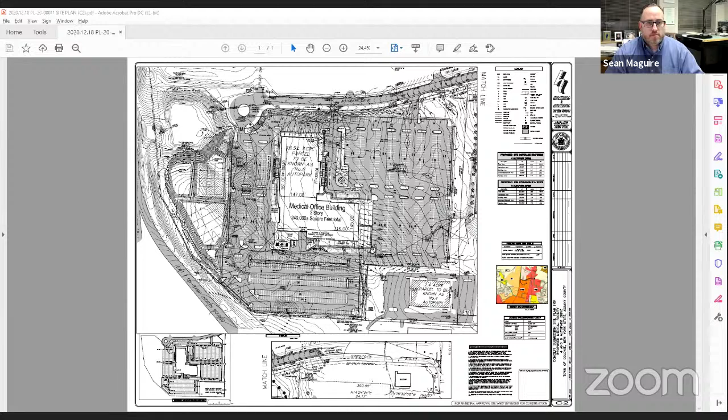There we go. Perfect. Zach, do you have access to that? I don't have it in the shared file here. Yes, I have it right here. Let me pull it up real quick. Sean, if you let me share my screen, I can pull that up for you. I've got it for you right now, actually. Okay, perfect. There you go. And we'll let Bill go ahead.

Hi, my name is Bill Mafrici with Hirschberg and Hirschberg. Dan Hirschberg might be chiming in at some point - he's at another Zoom meeting in Albany. With me also is Rich Rosen, Columbia Development. We're here for 4 and 6 Auto Park Drive and the medical facility.

4 Auto Park Drive will not be changed from its current configuration. We're just doing a lot line adjustment, and as Zach mentioned, we're requiring an ODA because there is no frontage or access to the public road on Auto Park Drive. If you can go to the next slide, Zach.

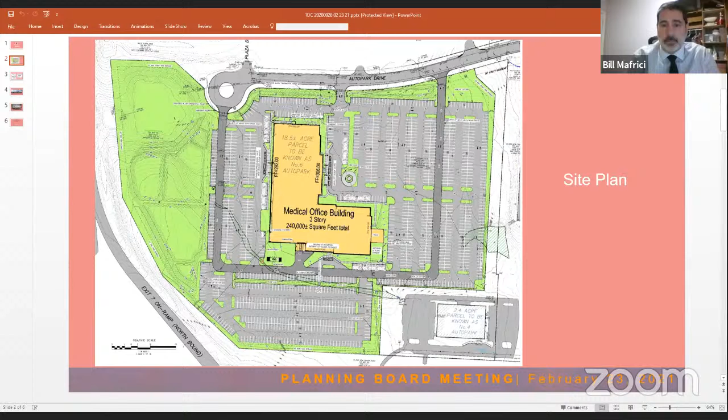Some of the modifications that were made now from concept from sketch: as Zach said, on the north side of the building, we did have the generator and transformers located in that area. We shifted it to the south side of the building. We also reconfigured a portion of the loading dock in the rear. If you notice, there's a darker hatched area for the pavement - that represents the truck route circulation pattern for larger vehicles.

We also show on this plan, which was not in the package, also what Zach said - on the north side of Auto Park Drive, we're proposing a walk. You can kind of see it at the entrance to the existing Goldstein on the north side of Auto Park Drive. We'll have further connection into our site on subsequent submissions.

Utilities, as far as water goes, will include a looped public water extension, which was requested by Latham Water District, the Auto Park Drive water main, and there's a dead end water main on the south side of number 4 Auto Park Drive. As part of this project, the developer is going to interconnect those two and provide a better distribution of water.

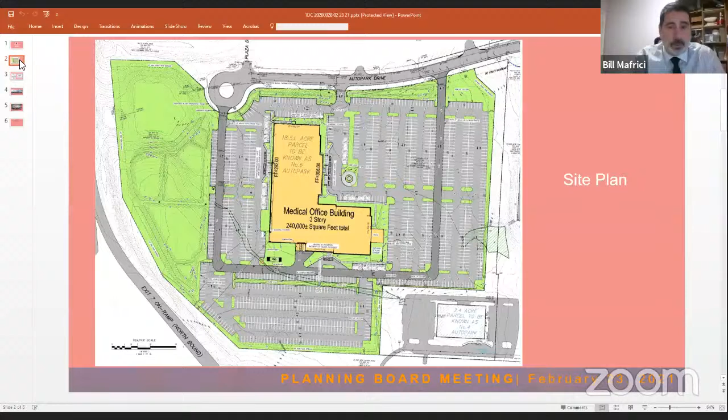If we go to the next slide, we're showing site stats for both 4 Auto Park Drive, which again is not going to be changed or altered at this time, and the proposed 6 Auto Park Drive, both of which are conforming and have adequate green space, exceeding 35%.

There is one difference in what we're proposing in the parking analysis. We further detailed and critiqued the interior layout of the building needs. In subsequent plans, when we submit for preliminary final, we will not need a waiver or reduction of parking. We'll actually be conforming to the parking requirements based on a combination of regular general office and medical office.

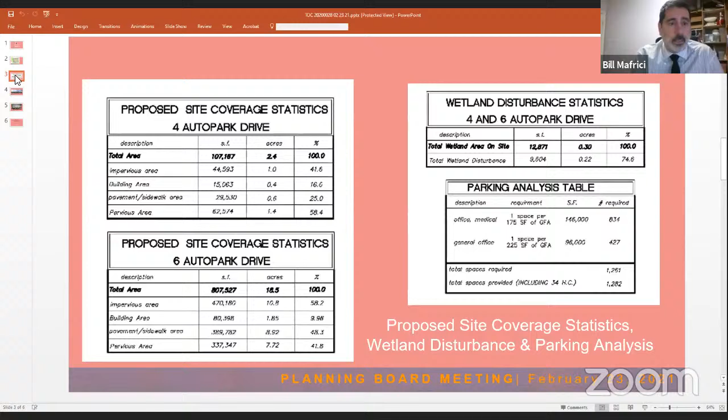The next slide shows the architectural renderings. This is a view coming down Auto Park Drive and the front of the building. The main entrance is fully glassed with an overhang and drop-off area. I think it's a fairly attractive building, and it is a 3-story building in the front.

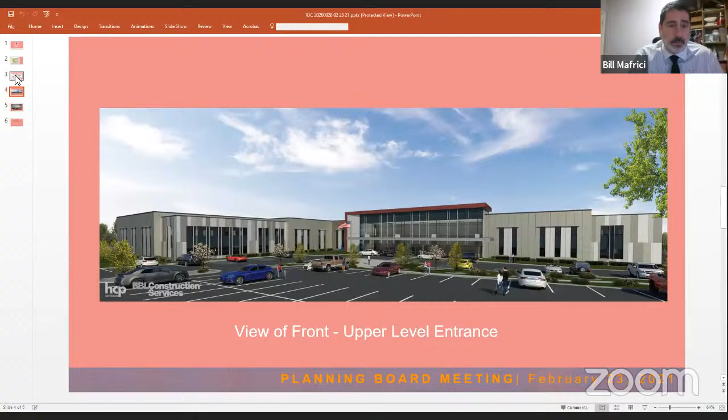The next slide shows the rear view, from the I-87 side, which is a similar configuration, a little less pronounced entrance and drop-off in the rear, but we still think it's fully attractive. If you notice on the top rim of the building, there's a parapet that's going to hide rooftop equipment from the view shed.

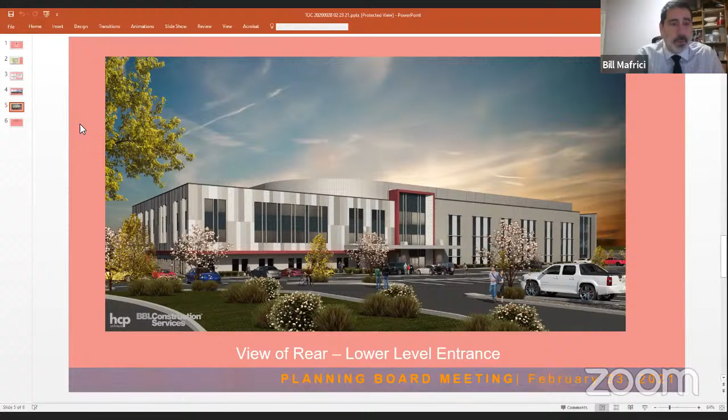And with that, I believe that covers the waivers. We're asking, as Zach stated, for 2 waivers: one for exceeding the 20-foot setback for the minor road, and also parking in the front yard. We won't need any parking waiver for the reduction of parking. Depending on how our calculation works out, we might need an additional waiver request for landscaping islands in parking rows exceeding 20 spaces.

And with that, I'd like to open it up to the board for any questions you might have.

Okay, this is being reviewed by our town designated engineer, in this case Barton and Loguidice, and we have Chuck Voss here. Chuck, I know you got a letter from the adjacent commercial developer, Chris Betty of the Betty Group. Can you incorporate their major comments in your presentation and just do your presentation, if you will?

Sure, Peter, will do. Can everybody hear me okay? Yeah, Chuck, real quick, sorry to interrupt.

We did get a flyover, almost like a presentation for that. Do you want to see the flyover, like it's on YouTube, that the applicant provided us? Would you like to see that before we go into the comments? Sure. Sean, do you mind pulling that up? How long is it? Short, right? Sure, we'll see it. It's like a 3D flyover rendering of the actual site. Okay, it'll be about 3 minutes.

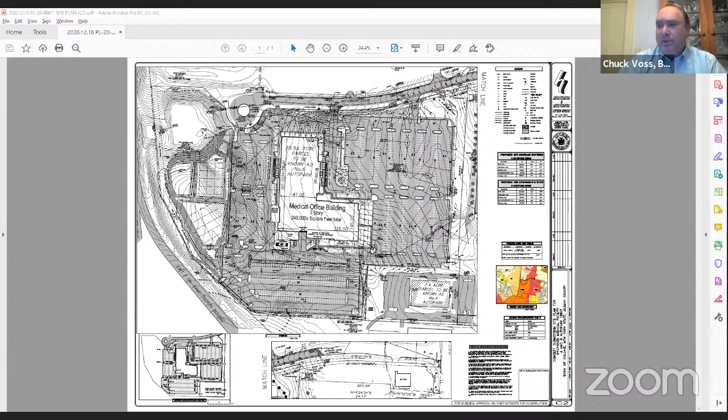They also noted that there are H-core standards for things like building placement, frontage, maximum setback, sidewalks, public spaces, and the ability to incorporate landscaping and pedestrian improvements to the site up to Route 9. So that's about it.

Chuck, you gave a lot of substantive comments. I'd like to give the applicant an opportunity to respond, particularly if there's anything they strongly disagree with, and whatever other general comments they think are significant in response to your review letter.

Well, just like you guys, we were copied in that letter. No, I'm talking about Chuck's letter. Oh, yeah, we're fully in agreement with Chuck's comments.

I think as the project progresses and we submit preliminary final, a lot of those things we will have addressed, if not already working to address. Our goal is to revise the plan and get it back in the town's hands as quickly as we can.

So we take no objection to Chuck's letter. Is there anything else you'd like to comment about the letter, or do you want to defer that? Well, I'd like to just make one comment about the additional driveways, or the 3 driveways. You see how the circulation pattern for separated deliveries...

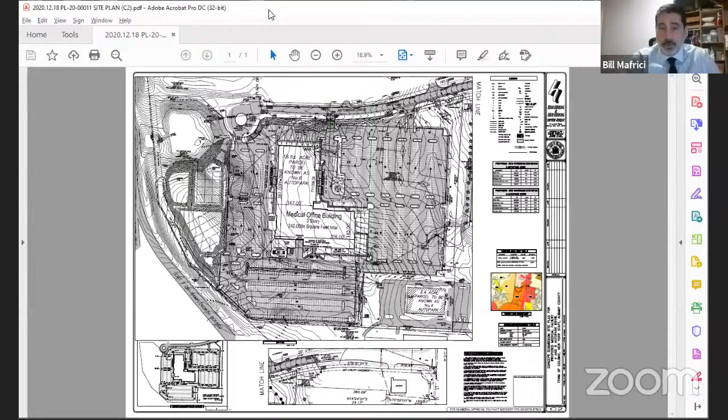And as far as the driveway access, I have to agree. We're talking driveway to driveway. Generally, we would talk street to street. We would try to be opposite, but in this case, it's not street to street. It's just driveways with intermittent traffic. So I don't have a problem with the location of those.

And calling the third one on the cul-de-sac, that's kind of—it's a driveway, but it's into a cul-de-sac, so I don't really think of that as a curb cut at this point in time, so I don't have any issue with the 3. And what about—no, I'm gonna stop right there. I want to leave it up to other people to talk. Go ahead. Okay, Craig?

Sure. First, I think the building is very attractive. I think it'll fit in very nicely there. I agree with Paul. I don't have an issue with the quote unquote three curb cuts.

I'm not supportive of interconnectivity to probably any of the adjoining properties, unless it's determined that we want some additional level of emergency access onto the site. I mean, interconnectivity to any of those other sites is going to put traffic out onto Route 9 at a spot that's not signalized. And it just doesn't make any sense to me.

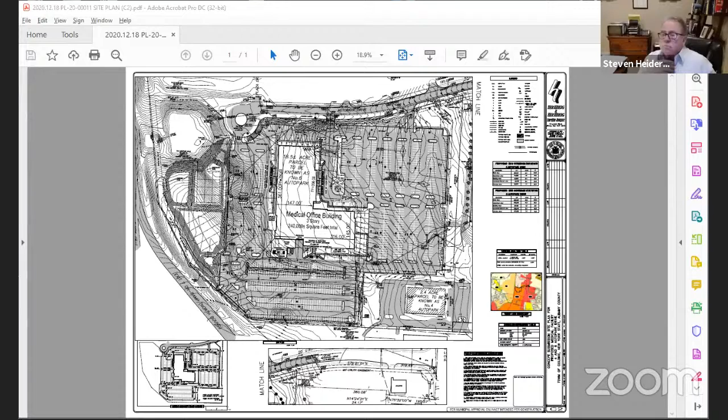Getting to building number 4, are they going to put a gravel road in right next to, on the east side of the parking lot?

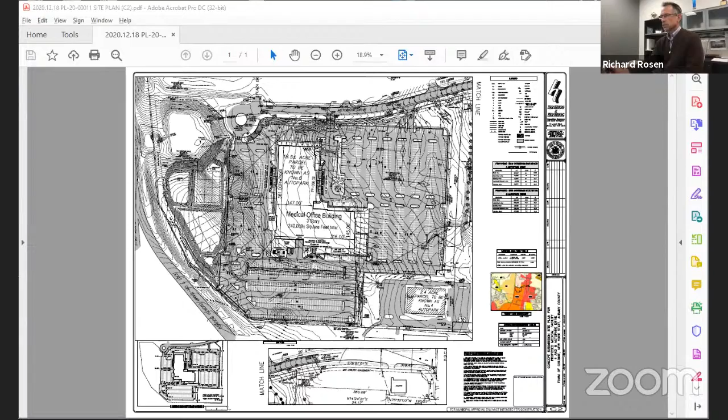Well, currently right now, building 4 is not part of our plan—we will not be acquiring that existing building. What we attempted to do, as you can see on the screen, is building 4 will retain property along the edge of our parking lot, on the east side, all the way out to Auto Park, and it'll have 100 foot of frontage on Auto Park Drive. Currently, number 4 Auto Park has site access in and out through an easement or driveway onto Route 9, past, I believe, 944 or 950.

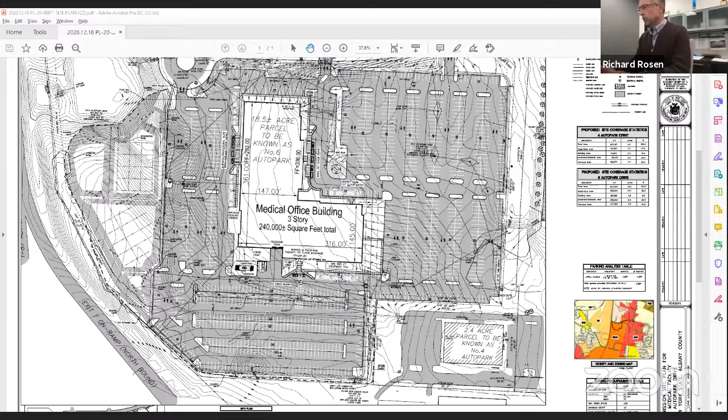In the future, if that site ever got redeveloped, we took the feedback and comments from the board from the last meeting on how to subdivide this parcel. So we've reconfigured it to make sure we have sufficient green space and areas to increase parking if someone ever came back in the future to redevelop this site. They could put a road in adjacent to ours out to Auto Park, or continue to operate the building with its existing ingress and egress onto Route 9.

Okay, I'd like to ask our town designated engineer—I want to follow up on your question, Chip. Can the town designated engineer or somebody in the department, Zach or Sean, comment on this? Are we creating a problem here for Auto Park, or do you believe the explanation is sufficient and there will be adequate access in the future?

Peter, it's Chuck, I can chime in. It appears Auto Park number 4 has a separate access point, potentially, via an existing driveway between several other properties down around 944 and 950 Loudon Road. We don't know if that would be part of an ODA agreement or access agreement, but you can physically access the site—meaning number 4—without having to traverse through the larger parcel, number 6, that we're talking about here.

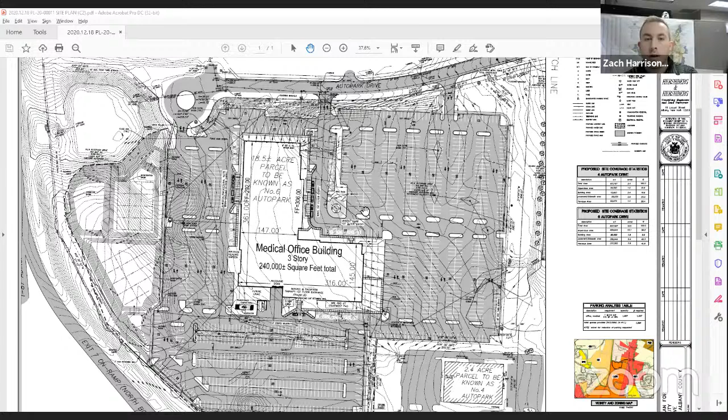Okay, I think that's an answer. So can Sean or Bill, correct? Up in the top corner, if Sean has the capability of zooming in, you'll see where the property with the lot line adjustment that they're going to have to do here. You'll see the frontage they'll have along Auto Park. It's kind of exactly where Sean's cursor is. He's going to show you on it.

They technically have the frontage along Auto Park. The dilemma we run into is that if any development happens on 4 for that property, they need access from the public, they need access from this town road. And right now they don't. So that's what we'll end up with.

Well, do we do the ODA now? Open development area, I know the letter was submitted to the town supervisor. Sean, do you know the status of that? That letter went to the town, was submitted to town hall back in November. I don't think it ended up on an agenda, so I'm just going to resolve that by March.

Okay, Chip, I don't know if that's satisfactory to you, but it is to me. Well, yeah, I guess it's going to have to be. If I could, from the department's perspective, I mean, we talked about this, I think...

I'd like to see that there's a connection here. I don't like creating this additional flag lot. I don't like adding potential additional curb cuts, which we've gotten all the justifications as to why we're not lining these up, and we have the potential to introduce another curb cut directly across from a driveway in close proximity to another curb cut. So I think that, from a long-term perspective, this isn't the right solution.

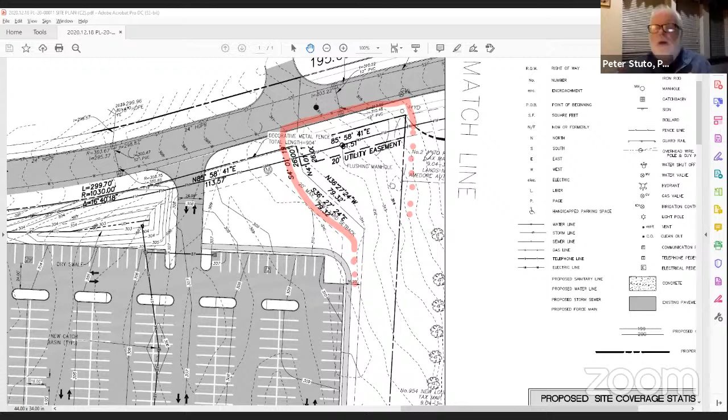Okay, my comment will be to our town designated engineer and to our planning staff, let's work this out, okay? I think you hear what the board's saying. I think the rest of the board members can speak for themselves, but we support the recommendation, we generally support the recommendation of our staff and our town designated engineer.

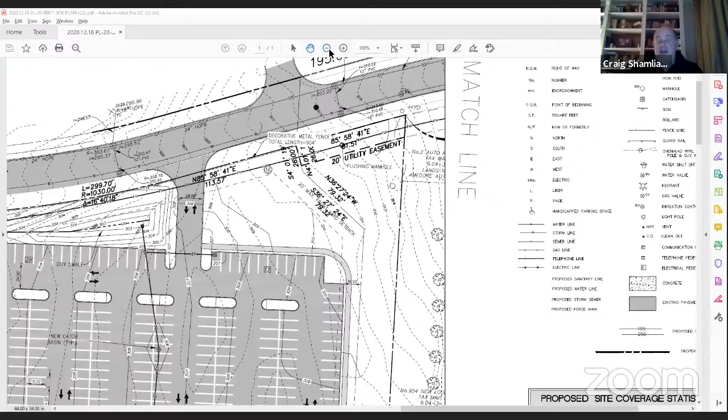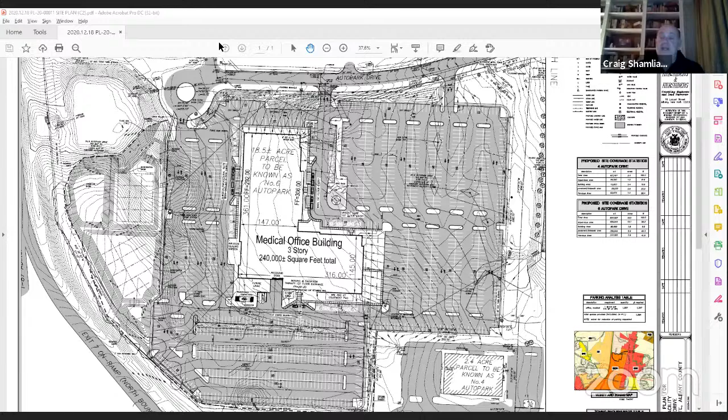If I can just chime in for a second. The one thing I'm not terribly supportive of is whether that becomes a flag lot or that strip of property goes with 4 Auto Park. I understand it would certainly meet the 35% greenery requirement, but what I personally wouldn't want to see is a massive building on the lot proper of 4 Auto Park and the green space be that strip all the way along out to Auto Park as the greenery. That to me doesn't meet the spirit of green space, just so everybody understands, down the road I would not view that too favorably.

And Craig, that's the challenge too, by suggesting this access up this strip here, is that if they needed to receive access, we blow the green space ratio out. Correct.

Okay, so you guys have a little math to do and a little revision drawing to do probably. Okay, Chip, do you have any more comments or questions?

I didn't see in the flyover or in the renderings an entrance for urgent care on the front of the building. It's supposed to be on the front, the section facing north, more in the middle of the L. Move it over so it's halfway... the part facing north on the front, right to the right of the word 'building'. Is that where you're talking, Chip? Yeah, right there, that's it. We've developed the plan in the building a little further, and at this point that entrance was removed.

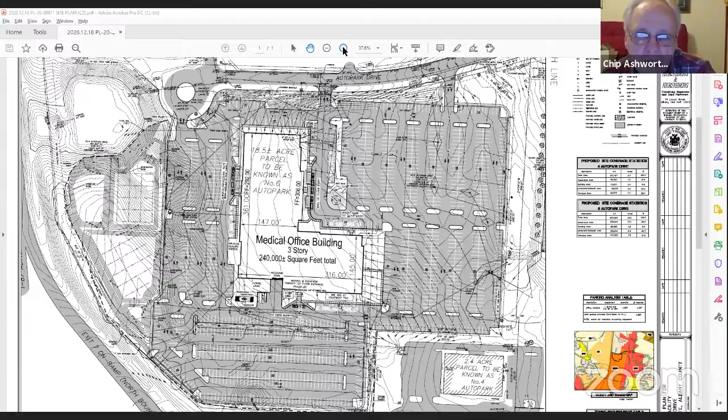I don't see any... oh, in front of the main entrance, on the other side, that big island, you have, was it 6 handicap spots? Right there. Go back to the big island, all those handicap spots, down near the main entrance. Yeah, right there.

Wouldn't it be better to put several of them over on the other side on the walk so they don't have to cross in front of traffic? I think the architect looked at that and didn't like the distance those spots were from the front door, but I can have them look at it again. It's just off the sidewalk and it'd be better than crossing in front of traffic. We have some challenges with the grade in that corner to make the transition from the finished floor, so it might exceed the requirements for a level handicap spot, but we can definitely look into that.

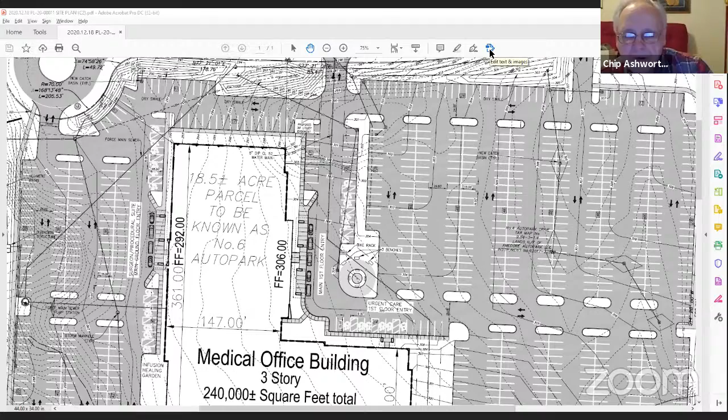As far as the electric vehicle charging stations, I think you should have them on each of 3 sides of the building, with main, real heavy duty infrastructure, because the time's coming when the majority of cars are going to be electric. Especially since probably a lot of the parking for employees might be on the south side of the building.

Yeah, we anticipate that, and I've already instructed Bill and our engineering firm to look at proposals for the best and most effective, most universal type of equipment to use. We plan on at least doubling, maybe tripling what we originally had on our application, as suggested by the town engineer. When I say heavy duty infrastructure, I mean so they can be expanded. So you're saying size the service going to those charging stations in case you need to add on in the future. Yes, sir. You will have to add on in the future. Yep.

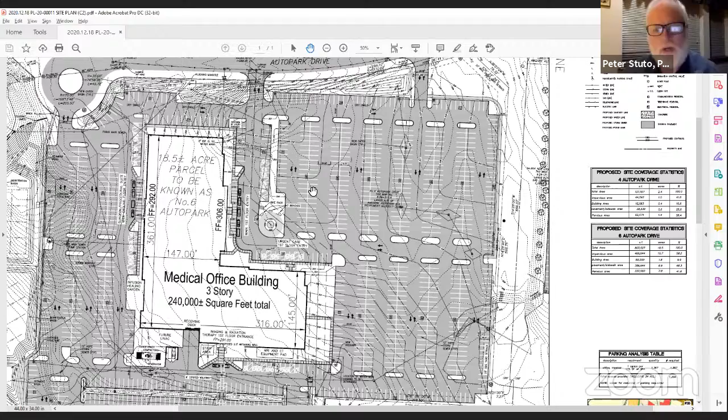Okay, I'm done. Okay, Lou, comments, questions? Looks like everything's been covered pretty much. The one thing I like, again, I agree with Craig, you ought to take another look at the parking and see if you can bank some of it, like you said you would. That whole area over there has an abundance of parking and it's never filled. I know this is a different type of business, but take a look at it. I don't see any harm in banking something, and then if you realize you need it, just open it up.

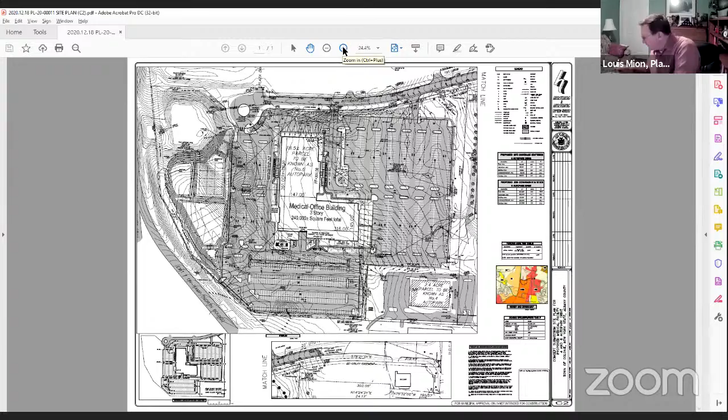To Chip's point about the handicap spots, instead of having them all in a row, can you have them like 3 on one side, 3 on the other, however it's broken up there? Yeah, we'll take a look at that. Instead of putting them alongside the building, leave them where they are, only bring some of them up so they're facing each other.

Am I making myself clear? Bring it there, yes, that brings them closer to the front, and either way you're going across. But there will be a considerable amount of busy pedestrian and vehicle traffic at that first floor entry and canopy, even though we provide sidewalks around the building and out into the parking field. Everybody's just going to take the quickest path and cut across there.

But we'll take a look at the locations of those handicap spots again. I look at the 7-Eleven building, and they've got it constructed similarly, along down the side, and it's actually easier to park across from the doorway and walk across. It's closer, and if you're in a wheelchair, or hurt and need a cane or crutches, it's a lot easier to walk across than to walk the length of the sidewalk.

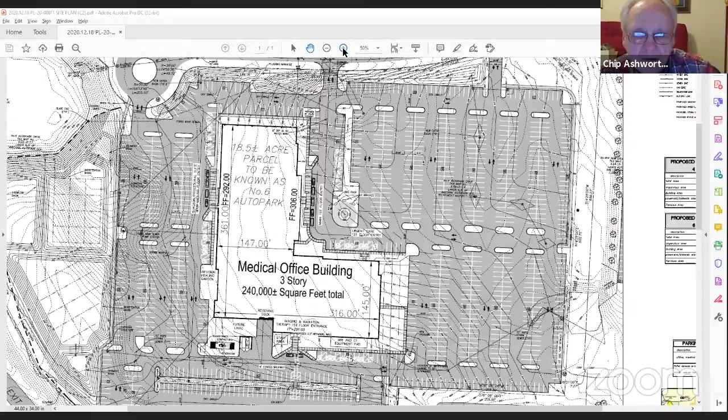Yep. While we're still on the subject of handicap spots, if you eliminated the entrance for urgent care, then why don't you move some of those up to where I suggested before, on the east side, on the other side of the main entrance?

Well, when we say we eliminated the entrance for urgent care, we are not going to have a drop-off or a drop-off canopy there. We plan on having probably an existing exterior door at that location to access that part of the building. Once I know who the tenants are and once we start getting into the interior design and programming, I definitely see that as some type of secondary entrance/exit to that side of the building. For now, that's our best guess and our best design going forward.

Okay, and another thing to piggyback on what Lou said, with snow removal, if you could bank some of that parking, that would be a spot where you could put the snow instead of having to truck it out. And if you ever had to open them up for parking, then you'd have to revert to trucking the snow out. That's it, thank you.

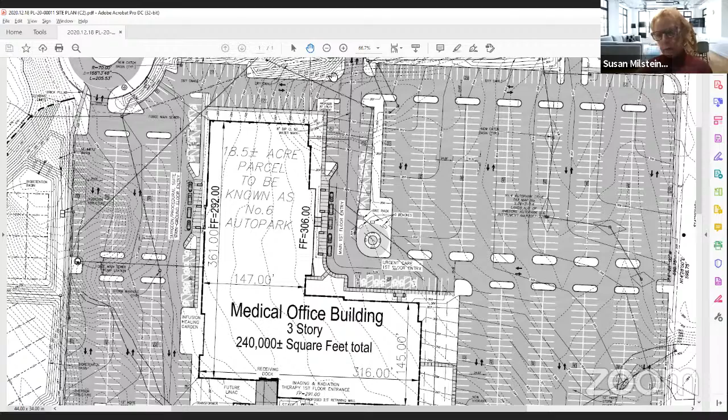Susan: So at this point, do you know who the tenants are? Respondent: I have a very good idea, but I cannot make a public announcement yet because I don't have a signed agreement. But we are working with medical users and an office user currently, right now in discussions.

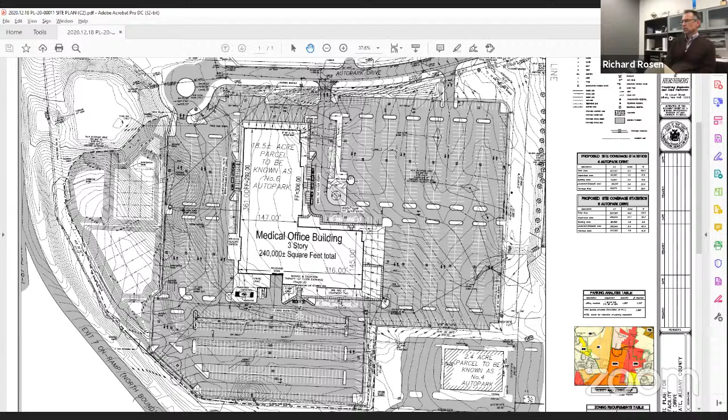And the reason I asked is then you would have a better idea of the parking needs based on that. Absolutely, absolutely. Right now we're doing it based on the operation of other properties we have, based on the use. So once we firm up who's going in there and what's actually going to happen, we can take a more accurate look at the parking requirement. That's my only question or comment.

Okay, Chief Heider? Yeah, I don't want to belabor the points, but as to the parking, I think you have to look at the use of 711 and 713 Troy Road, where many times you have to drive around that parking lot to look for a space. It's a comparable sized building or set of buildings with a comparable number of parking spaces. So as much as I love bank parking, you may have to think twice about that.

But if you do think about bank parking, I know everybody's probably looking at that south area to use with snow. I would like you to bank the top area, the north side, because I think there's a lot of blacktop facing Auto Park Drive. I get the location, it's a beautiful building, it's the right place for it. But if you were to bank anything, I'd bank that whole front parking that borders Auto Park Drive, which I'm sure nobody's going to want to bank, but that would be my suggestion.

Landscape wise, I think the flyover was great, as long as that's what gets planted. And I think that should be put in the minutes, because I think it would look very extensive and very nice. This number 4 Auto Park bothers me.

If you drive past that building, the address on the building is 950 New Loudon Road, not 4 Auto Park. And there's an entrance from 950 through the parking lot, through the snowbanks. They're using that to get back to this building now, as well as this easement going out to Auto Park Drive. There's already a building on it, a very old warehouse, a pretty big warehouse as it is.

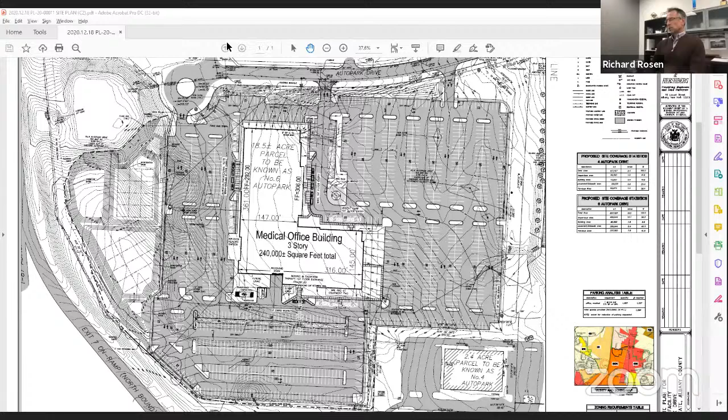I mean, that depends on the use and who it is and what they put back there, that was the future of it. So we thought that providing that 50-foot strip up the east side of our property and the 100-foot access, almost trying to create a flag lot, was our best attempt to try to keep that parcel as independent as possible the way it is right now.

Right. Well, I think that precludes, just what you're saying, what Chuck said before, you're not going to get into interconnectivity between this lot and any other lot. I think the Betty letter addressed that by offering Plaza Drive as interconnectivity with Century Drive, but it would probably be through an easement because that's a private road. So the Betty letter did address that to a certain degree.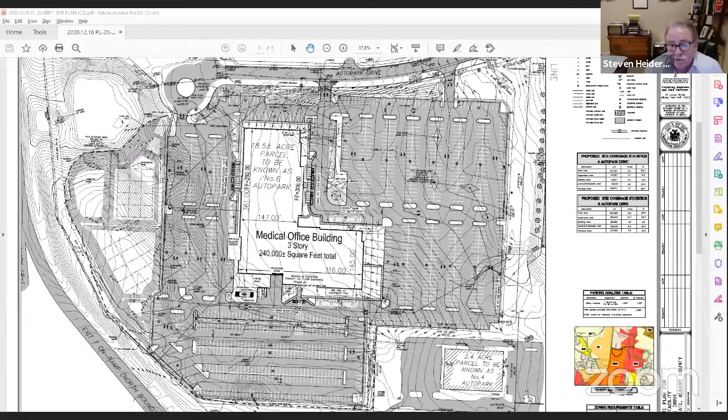My only other point is to really concur with Chip on the electric cars. I got to tell you folks, at first I thought that was just a fad, but in my business I'm in a lot of people's houses and garages, and I'm seeing almost every year twice the amount of electric cars than I saw the year before. And when I look at new houses being constructed now, more and more of them are being constructed with electric charging outlets in the garages. So I don't think even doubling it is going to work here. I think you really have to make sure you have substantial stations around all sides of that building. And that's it, Mr. Chairman.

Yeah, thank you. I just have a couple questions. Can we turn to the shot that shows the green space, most of it where the stormwater management area is?

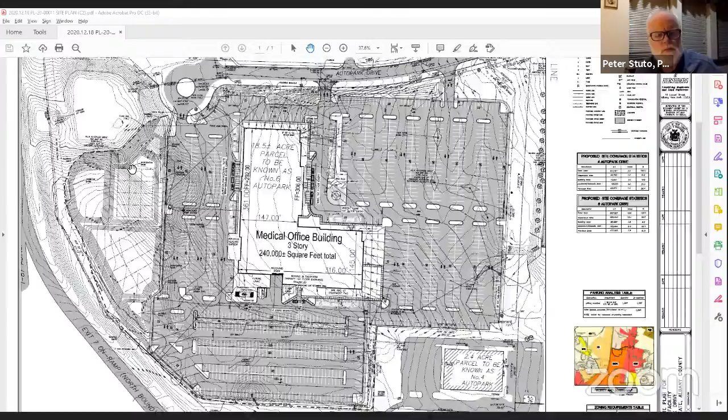Okay, we can do it with this one. There was a colored one, maybe that was in one of the applicant's exhibits. Is that all being counted towards green space? That's my question. And isn't that already the existing town basin? If somebody can explain that to me, I'd appreciate it.

No, this is Bill Mafrici. The town basin is on the northwest side of the property. The other three basins that you see are proposed, and yes, we are counting that as part of the 58% green.

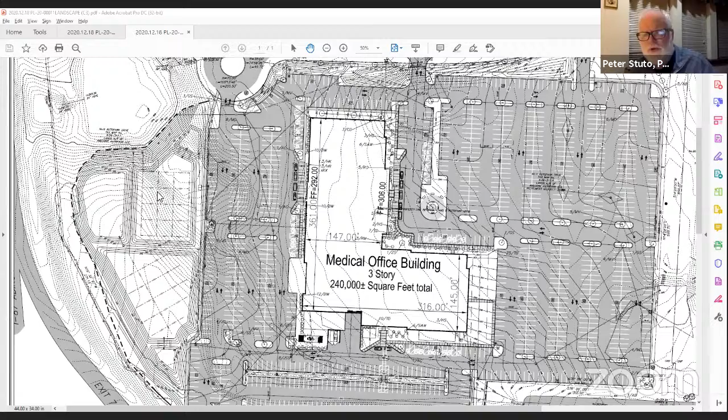Okay, and my other question had to do with electric too, and you may have answered it and Chief hit on it, and I guess Chip did. I was thinking about lot 4 when Chip was talking about it. For an education for us, we can all see the trend going in that direction. How do cutting edge developers view that issue and view that problem?

Well, the big discussion always is, and I've been working a lot with Albany Medical Center, Saratoga Hospital, and St. Peter's on their new facilities. Believe it or not, the question comes down to who pays for the power. Nobody wants to make a commitment or make that choice yet because they don't know how it will be perceived. So if I provide the power for free as the building owner, then who pays for it? Do the tenants pay for it, or do you charge the person that's coming to plug in that day and make them pay for it? And how is that perceived from a customer client basis?

And then also, how long will those spots be tied up? Because you don't want the doctor in his big fancy Tesla to park there for the day, plug in, and he charges there every day and doesn't have a charger at home. That's really defeating the purpose of trying to provide convenience to the clients and customers coming to the building.

So you can enter, they have these programs where these companies will put the infrastructure in for these chargers, but they want to charge, so you got to go in and swipe. They're like little private gas stations, if you will. They'll come in, put the equipment in, but if you want to use it, you got to swipe the credit card and pay.

And they can put limits on it so people can only park there for an hour and they have to move to get an hour charge, or a 2-hour charge. But everybody sees the need. It's just a matter of how they want to present it to the public and their clientele, and basically who's going to pay for it. Okay, thank you.

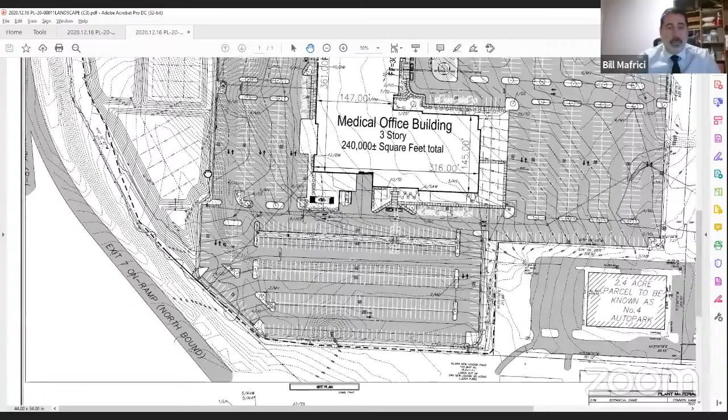Can someone enlighten me? Yeah, I can respond to that. It's kind of tough to see, but we do show a grading, or an edge of woods, represented on the site plan — you know, the squiggly line.

At some point we need to remove a portion of them because they're going to be impacted by the grading of our SWPPP basin. But the majority of those — the southerly portion — will be impacted. We think the northerly portion, we can retain a majority of those trees. We can identify on subsequent submissions the actual trees that are going to be removed, but there are going to be trees on that southerly portion that we can't fit.

Okay, Paul — well, I would like to see them in the minutes on your final submission, how many, and if you could have someone go out at some point when the snow is gone and mark those. I have a feeling the CAC is going to want to go out and take a quick look at that at some point again.

But that would be fine. Thank you. And Paul, this is Chuck, just to further add — the most important screening trees are the ones Bill was referring to along the northern edge. We specifically went out along both the north and southbound lanes, took a look at the site, and came down the slip ramp as well. Because of the grade changes where the southern trees are proposed to be removed, you really don't see the site hardly at all through there.

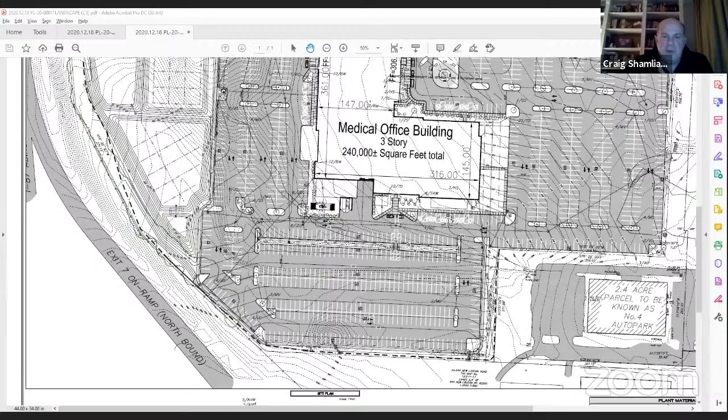Thank you. Okay, anything else from the board? Yeah, Peter, one other question. There was some conversation about sidewalks. Can somebody go over what's being proposed for sidewalks and where we are with sidewalks along here? Both internally or externally or both? Along Auto Park. Yeah, okay.

Are there, Chuck, sidewalks now on the north side of Auto Park? So where Plaza Drive and Auto Park was just developed, I think it's 15 Plaza Drive, it's First Columbia's development. They built sidewalks along Auto Park Drive and stopped it at their property line. The idea that Chuck and I had were to, instead of having it along the front of 4 and 6, do a connection point from the existing sidewalk that Chris Betty and First Columbia developed and bring it to Route 9. Okay, so you'd have a full connection, a full walkability from Route 9 down to the site. And then there'll be interconnectivity to 4 and 6.

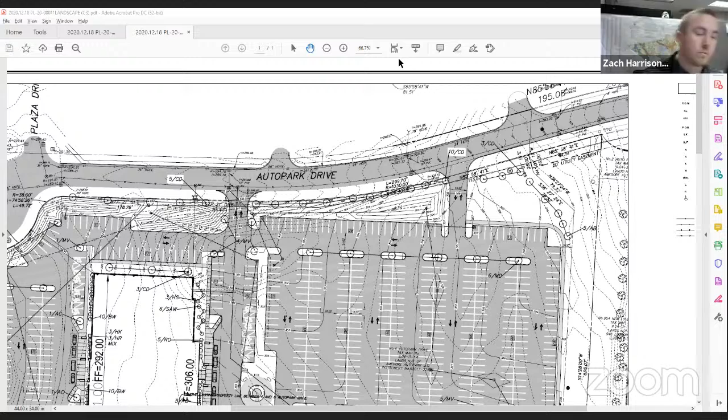Okay, thank you. But Zach, would you be walking across Auto Park and then walking into a driveway where cars are coming in and out? We're going to have to have connectivity. So is there going to be a sidewalk somewhere there for people to walk once they cross over to Auto Park? Yeah, they'd have to modify that internal first driveway to put some sort of crosswalk there and sidewalks along the side.

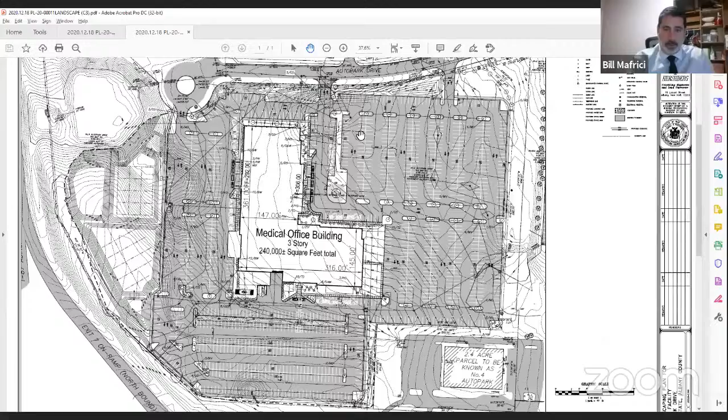Okay, thank you. Any other questions or comments from the board? Yeah, the usual amenities, I see nothing for picnic tables or anything like that. We do have some benches and site amenities in that center island circle. Okay, all right. And then, Bill, also down on the southern side of the building, you'll see a large green space from that one entry heading toward the east. That'll all be seating area as well.

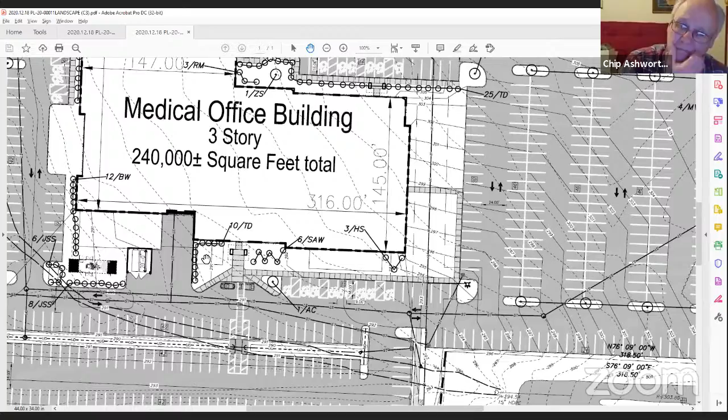Okay, any other comments or questions from the board?

Okay, so we have to move, we have an application for concept approval here. I want to set the stage and make sure everybody, we have a consensus on how we're going to move forward. I think the board is reasonably pleased with the concept, and I think it's in a position to take a vote on that. But I also think there's a lot of open issues, and this is a type 1 action.

So does that mean there's an EIS involved? No, Peter, at this point an EIS wouldn't necessarily be required, but they have to submit a full environmental assessment form. Okay, are we doing more traffic analysis or no? Yeah, that was something that was raised, and I think we're going to ask the applicants to give us a traffic assessment and report anyways. So we'll take a look at that, and if we need more information based on what they submit, we can always ask for that.

Okay, I'm headed in the direction of, even if we vote on concept and it's approved, we should come back for an update before final, because there's a lot of outstanding issues. Is the board in agreement on that? Yes.

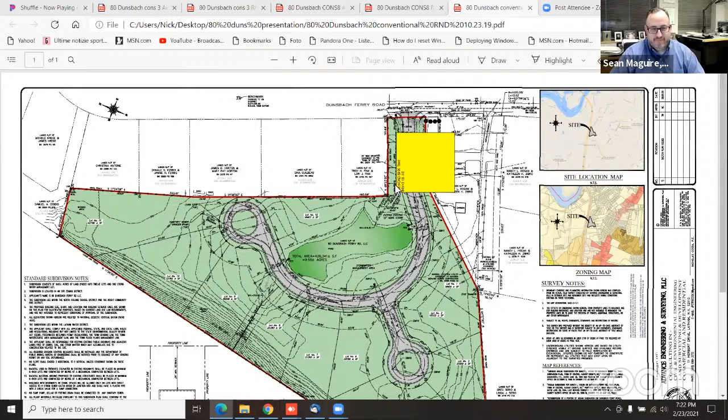Let me go back. Since you're seeing it for the first time, you saw it first back in April, but this is the conventional layout we came up with and initially shared with the board, and then the board asked us to try a conservation subdivision. As I was starting to say, the parcel is 9.65 acres. It has frontage along Dunsbach Ferry Road, along where my pointer is, even though there's a yellow label box that comes up. It comes back and goes, and this is the area parallel to the I-87 Northway corridor. This is the boundary of the Northway road. So this was the original layout.

Let me bring up the conservation subdivision that we had done. Are you able to see this now? Okay, this was the conservation subdivision we presented to the board. As you can see, we had a road coming in to connect to Dunsbach Ferry Road, and then two cul-de-sacs. One cul-de-sac terminated here, near the label for 87, and another cul-de-sac located right here. We had a couple of keyhole lots. Again, the board commented they were not in favor of having these homes so close to the Northway. I want everybody to understand that right here there's a large berm that, when you drive by the Northway, really precludes you from seeing the parcel. It's a substantial berm, developed with mature trees on the side slopes, on top of the slope, and on the other side of the slope. That berm goes along here and continues to the north. It gets a little smaller but then increases in size again.

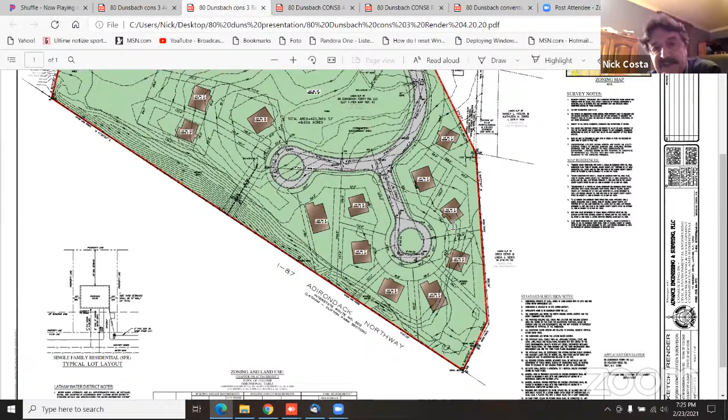So what we recently submitted, excuse me, is this redesign, the new concept where we're still coming in from our access point on Dunsbach Ferry Road. We took away the cul-de-sac that had all the homes fairly close to 87, and extended the road to create a cul-de-sac here so we eliminated the keyhole lots, which the board was not in favor of. Also, fire services wanted a road to access those keyholes that was almost bigger than the town road we designed here. So that's the modification that was done. Along with that, I want to note there's a solid 6-foot-high white fence that separates the site and gives privacy to those lots from this parcel. It runs over the entire rear of these homes.

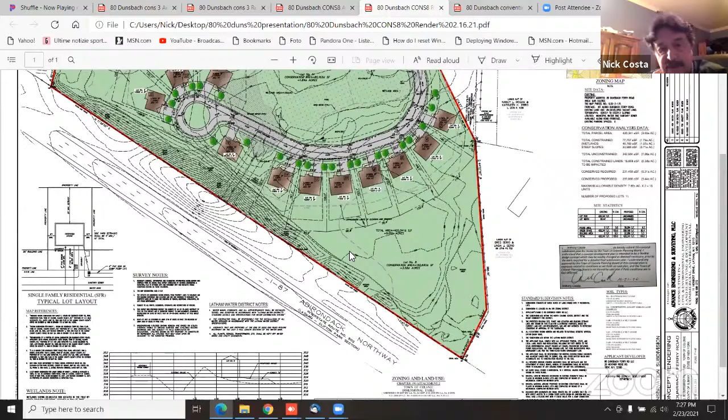We've also done a section through one of the lots to show how the roadway system and the home would be comparable to the berm that's back here, and also shows the Northway. So this is the Northway in that section, and then there's the berm, and this would be the home, and the roadway would be out here.

And that's really a lot number. I believe it's this lot right here, which is lot number 8, and the address is 16. That's this section right here.

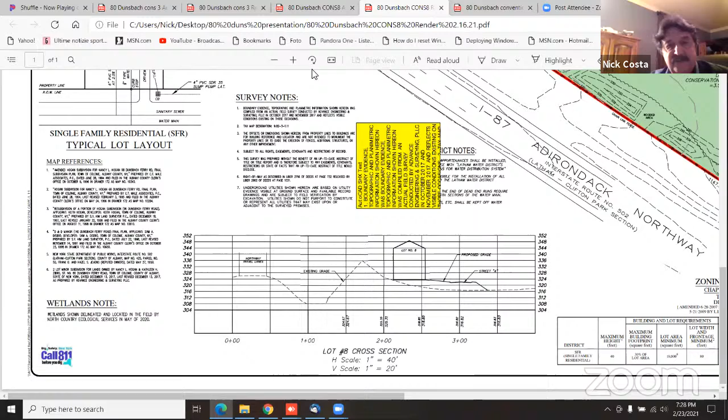With regards to the conservation analysis, as Monique said, we calculated the conservation analysis, and we took into account the constrained lands, which is composed of the wetlands that exist on the site. There is a pond, and that pond, by the way, is totally fed by a very large storm pipe.

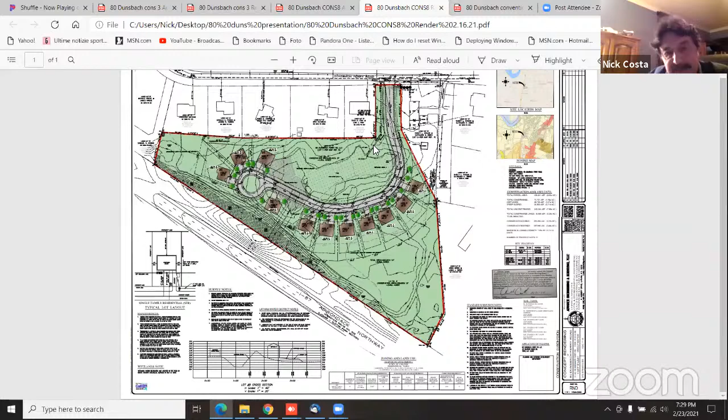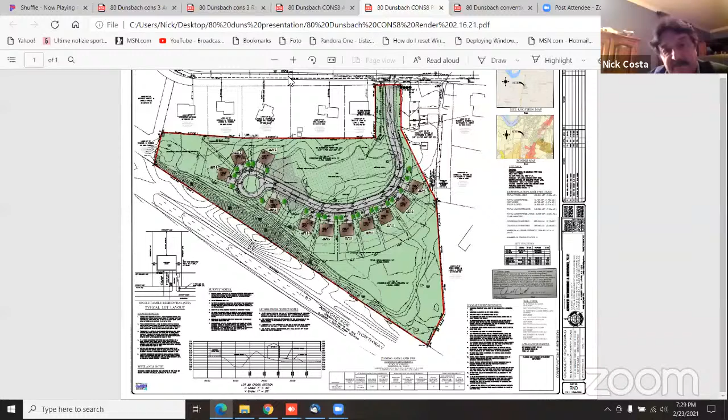I think it's either a 30-inch or 24-inch pipe that drains the entirety of Dunsbach Ferry Road. So the farmer that owned this parcel gave an easement to the town when the storm system was installed on Dunsbach Ferry Road for the stormwater to be dumped into that pond. I don't know, maybe the farmer used that water to irrigate the fields back here. But it is a substantial amount of stormwater that goes into here, and the rest of the time, in dry season like we had this summer, the pond is reduced to very little amount of water.

There is another storm line that comes in from here that picks up the stormwater drainage from these areas. So the pond has a discharge out to this depression that is between the Northway and the berm, and we believe that the water runs out towards the Mohawk, towards the north. So that's the wetlands that are on the site.

And then on the site there are some steep slopes, which the conservation analysis requires us to take into account, and that accounts for about 3/4 of an acre for the steep slopes. So for constrained lands, there's a total of 1.79 acres. A little more than an acre is wetlands, which is mostly the pond and the areas next to it. And then the total unconstrained lands is 7.86 acres.

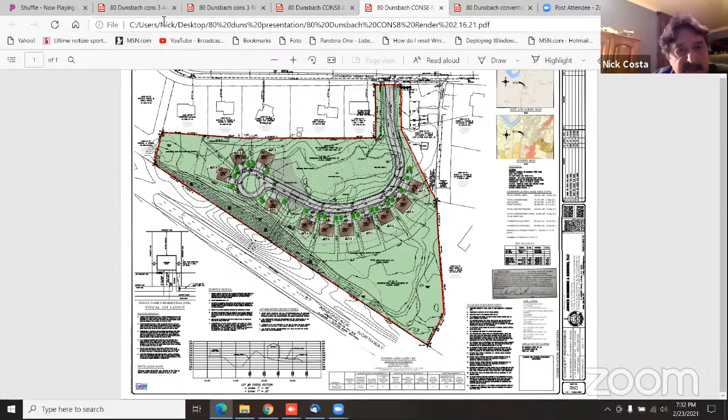I do have another. This is an aerial view of the original one, and I also have an aerial view of the new one. Yes, here it is. This is the aerial view that shows the Northway, and also the neighboring properties, and their proximity to the Northway.

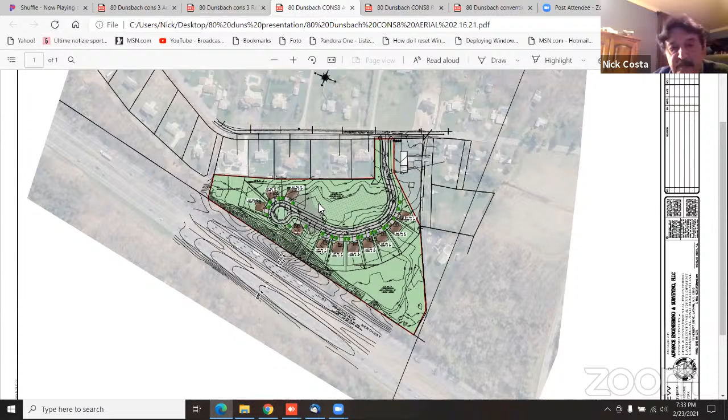If there are any questions, I'd be happy to try to answer those from the board. I'll leave this up, because I know Joe Grasso is going to be doing his review, or reporting on his review of the revised layout. So I'll leave this up if Joe needs to use it.

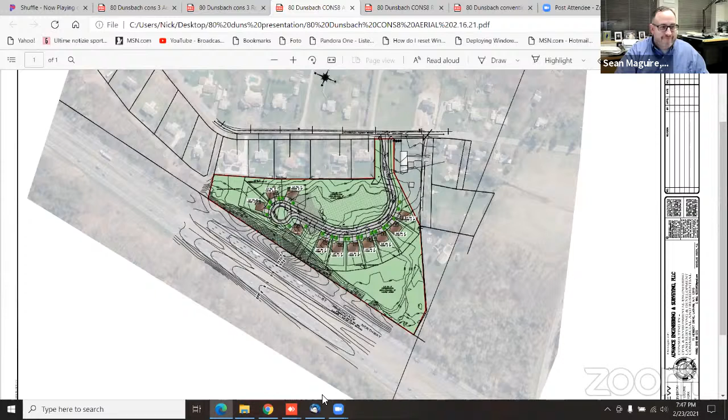I'm going to ask you to unmute. Thank you for the opportunity to participate this evening. I'm thoroughly excited about having the opportunity to voice some of the items that I've identified looking over the plans.

My first question is in regards to wetlands. There was a lot of discussion. It's not clear to me through the applications of the documents supplied on the website that the United States Army Corps of Engineers has looked at the impacts to the wetlands. I'm not sure if they regulate the wetlands or there's some New York State DEC involvement with regards to wetlands.

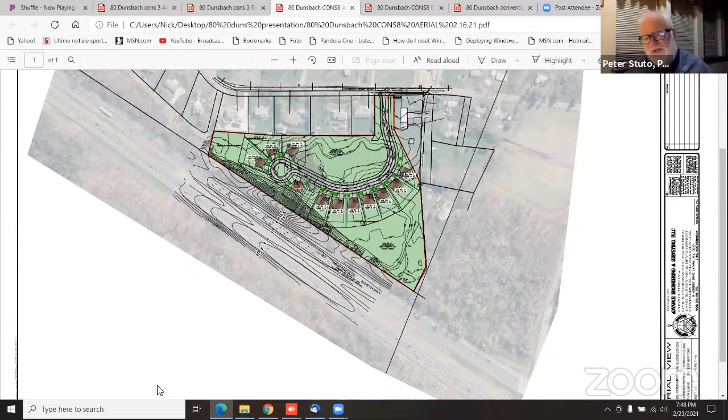One of the other things I noticed is when the applicant—you can get all your comments out, we'll address them, go ahead. Okay. The other comment is when I was looking through the building permit, the application says no for impacts to floodplain and wetlands. That seemed contrary to the drawing.

One of the other things I did not document on the drawing is the way the road is laid out. It appears that when the snow is plowed, a majority of salt will be going into the wetlands, which could be an impact negatively environmentally.

In addition, this project will be north of another project that's with the planning board currently. The Cicero property is being developed as well. So I think you're going to see a substantial amount of stormwater from these two projects impacted together, which kind of gets me to the next item.

Will all stormwater be discharged to the west towards the northway? Will the roof drains from the project be discharged to the west as well?

You did a good job of describing the Conservation Development Act and the requirements of meeting the acreage. It was not clear to me, at least, although I'm not an expert, that you met the intent of that regulation.

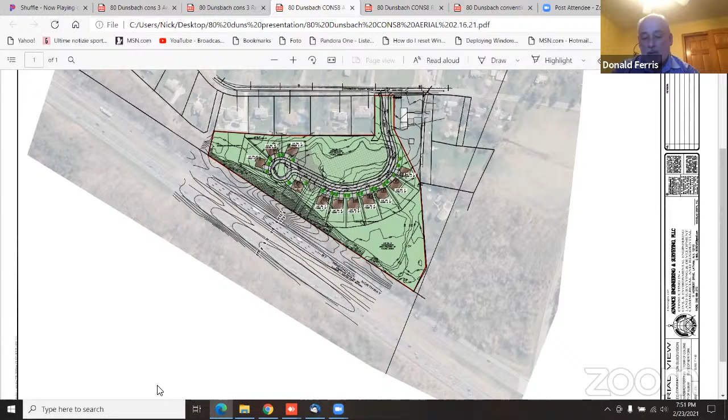Will the berm have a swale on each side to direct the stormwater to the west into the project? What type of vegetation will be used on the berm? And who will be responsible for the upkeep and care of the berm?

I think it was identified just recently. The drawings indicate single-story dwellings. We want to ensure that that's documented.

Elevations of all lots—it's not clear whether the dwellings of the project will be below or at the existing level of the properties on Dunsbach Ferry. We do have a question of what the price ranges of the homes will be.

Deed restrictions. Will the conservation area and proposed berm landscaping be put into the deeds for the homes on lots 10 and 11 to provide maintenance, upkeep, and prevent removal? Will the existing wooded area in the berm running adjacent to I-87 be put into the lots to prevent removal and modification? We'd also like to see if there's a recent noise study that's available for public review.

I think that was also a comment tonight. And then lastly, developments and projects in the local area. I think tonight, when this meeting started, we talked about 4 and 6 Auto Park Drive. Again, we have multiple residential developments on Dunsbach, Pollock, and now Sparrowbush.

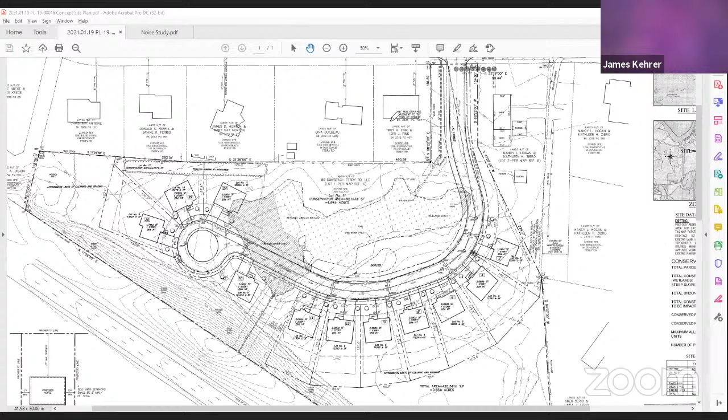No, Nick, you're right on target. These are going to be typical Marini homes, ranging between $350,000 and $450,000, especially for that area. Okay, well, thanks, Jim.

There was a question regarding the deed restricted areas and how those would be protected. It's the typical way that areas deemed worthy of protection, whether a new berm, existing berm, or existing or proposed landscaping, are protected through deed restrictions, which prevents their removal.

There's a question regarding the existing wooded area and berm along the northway, and we raised those concerns in our previous comments, so that's up for the board's consideration. There's also a question about the noise study, and as I mentioned, we are not aware of one being done yet.

Nick, did you want to respond to that question? Sure, Joe. We have asked 3 different consultants that do noise studies to submit proposals. The applicant is willing to do the noise study. It's just that at this juncture, believe it or not, we have not received a response from any of the 3 outfits we requested it from.

But we'll be asking again to the same folks. There isn't a lot of people that do noise studies. Joe, if you know of anybody, please share that with me, send me an email. But the 3 outfits — I don't know if it was because it was done during the end of the season and they were busy finishing up other projects — we didn't have any luck with any of those 3, and I'm afraid I have to ask them again to send us a proposal for doing the noise studies.

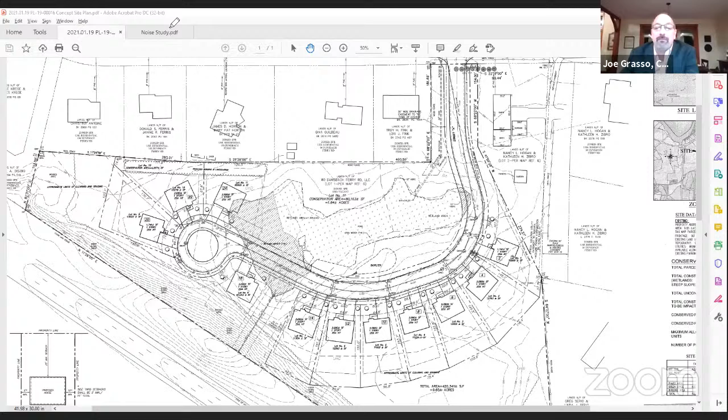But the applicant is on board to do the noise study and get the answer regarding what the noise levels are in the various locations where there would be lots on the site. Okay, thanks, Nick. No, I do not have any noise consultants, I don't know of any, so I can't recommend any. Well, that's why I was asking, Joe, because they're not easy to find. No, they are not.

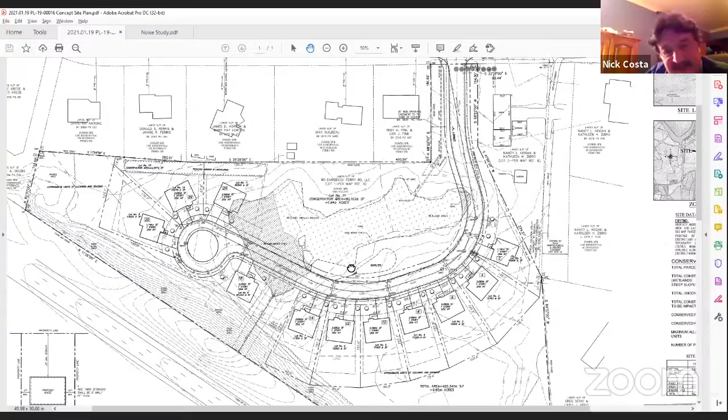And then the last comments were regarding the multiple developments occurring in this area of the town. Yeah, and whether or not — Joe, sorry to cut you short — fortunately we're also dealing with the Cerrell development, and I can tell you that the way our stormwater design is currently done for that site, we're going to be substantially reducing the amount of stormwater coming this way. We actually discussed this with John DeZilo and made site visits.

We're going to be sending our stormwater down Pollock Road, where there are properly sized culverts that get it into the creek that crosses Pollock Road under the Northway, which has the capacity to take the water, whereas this pond and these small pipes were always undersized. The pipe that connects from the Cerrell property to this discharge point is a 12-inch HDPE pipe, so we couldn't direct our stormwater towards here. So we did a lot of field investigations, walked the areas with John, and came up with a way to reduce the amount of water contributed from the Cerrell site.

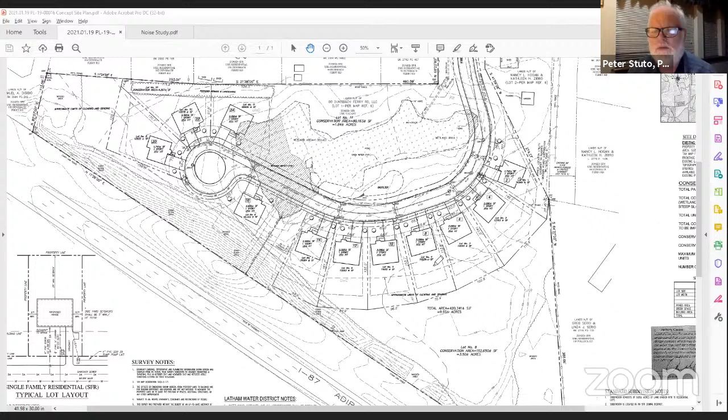Okay, Sean, did you have comments? I know the departments reviewed this as well. I don't know if we have Sean here. No, it was my project. I don't have any other comments.

Pete, from my position as director, seeing all the projects going on and some of the enforcement issues, there are a couple of concerns I have on behalf of the department moving forward. One is this trend we've been seeing where we've got these conservation areas that create limits of grading and clearing on the backside of the lots. I've highlighted that in red.

One concern, which I think we raised more recently with Nick Uvan's property, is from a management perspective. We try to achieve the goals of the conservation subdivision with these, and I'd say almost artificially, by putting these limits of grading and clearing that, at the end of the day, this department has the responsibility for managing and enforcing, which, with the project load in this town, is difficult to do. So we certainly prefer not to get into managing those. What it does is add to the conservation calculation, but it doesn't improve the overall quality of the conservation areas.

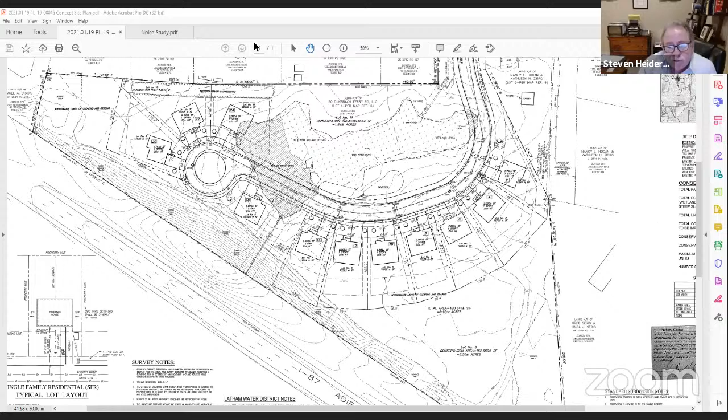It's in the fire code thing more than anything, I think. It has to do with the number of structures there. Yeah, I think it's NFPA. I think it's 10. It may be 10. I'm not positive.

But so I think maybe if you look at the length and the fire code, you may have to, if you do have a house at the end of the cul-de-sac, you probably want to see about putting sprinklers in it. That might be something to look at.

Okay. Thanks, Lou. Thank you. Good evening, Nick. Good evening, Chip. How are you? Good.

Yeah, my biggest concern is you'd have to eliminate number 11 and combine the last two lots. And I think that's even stretching it.

Okay, Craig? Yeah, I mean, I'm generally in agreement with what everyone else has said. If the plan were to stay the way it is, Nick, how many trees, how much of the existing buffer along the Northway would get cut, if any?

That's a good question, Craig. That grading limit line is something that we did from actual grading. Normally, when we're in concept stages, we don't do grading, but in this case, we did the grading, and that line is what it hugs.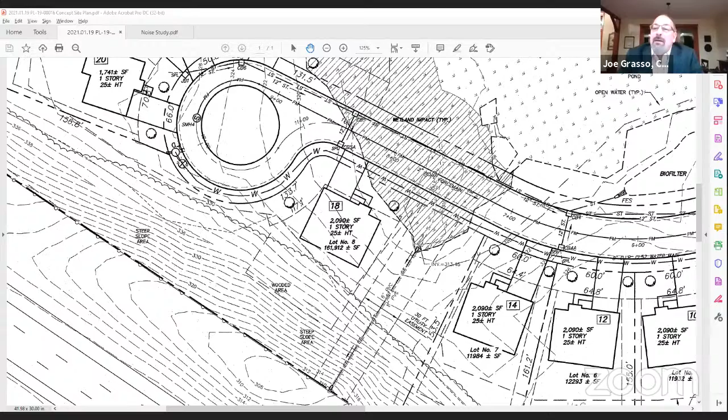Hey Nick, this is Joe. It sounds like you're hearing and trying to respond to the planning board's comments regarding minimizing the impacts on the berm, the vegetation, and the wetlands as well. You talked about pulling the cul-de-sac back. From my cursory review, it looks like to avoid a large number of wetland impacts, you would need to pull the cul-de-sac back to the south side of the wetlands. Is that something you've taken a look at, or would you take a look at?

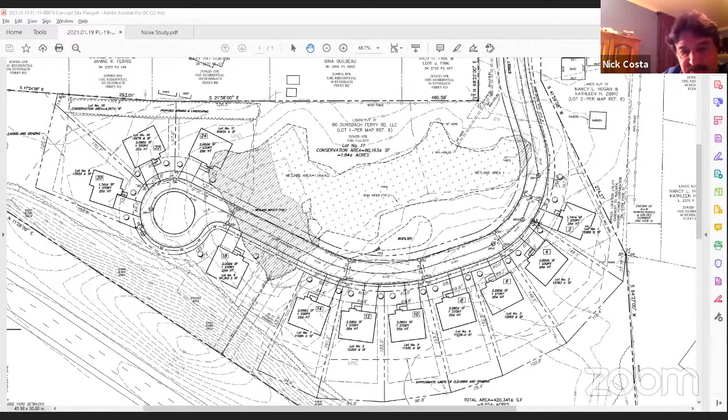Joe, I think if you go back to our previous plan, we had some keyhole lots that were coming back and not having such a large impact to the wetlands. But the keyhole lots, as I mentioned, the fire services wanted a 26-foot wide road to get access with their equipment. That's when we said there were 3 keyhole lots, but by the time we get done doing the 26-foot wide driveways, we would be having even more impacts. So that's why we extended the cul-de-sac.

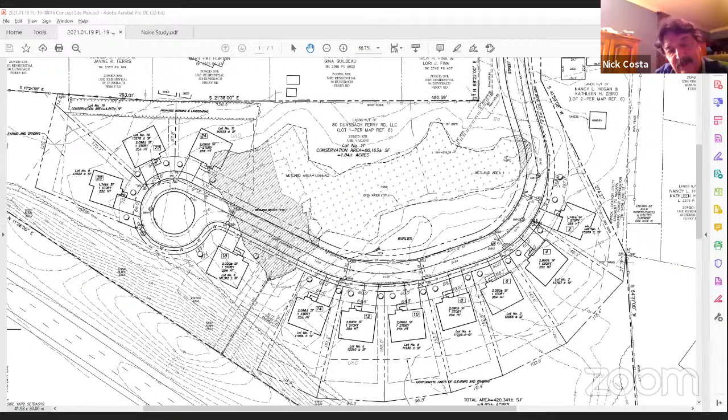But extending the cul-de-sac created some additional problems, Joe. So we'll have to revisit that. To the south of it, I think we had less of an impact if you look at that. But that layout was totally different - we had the other cul-de-sac. They got us some lots closer to the northway.

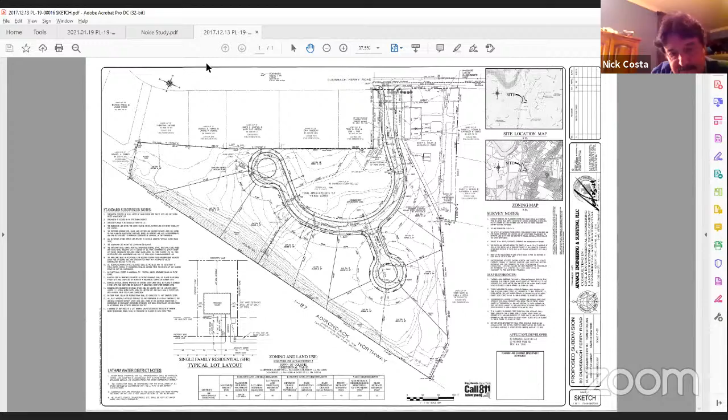Okay, I think a lot of good statements were made today. Joe gave a good review. I think Sean added a lot, and I think the problem of having grading restrictions and deed covenants in the backyards is not a desirable thing from the town's perspective. Yeah, understood, understood. I think Chief summed it up - this is an engineering challenge, and we have a good engineer here to meet the challenge, I'm sure. Thank you, Peter. All the good parcels have already been developed in the town, so we're working with what we're given, and this is a challenging site. So we'll put our thinking cap back on, and we'll get you a revised layout as soon as we can.

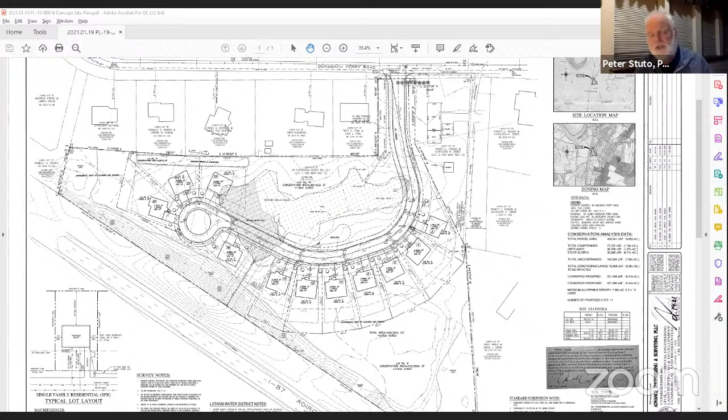I'll just say, bottom line, I think you've got to seriously think about reducing the number of lots. This is not a maximum build-out size lot, in my opinion. So yeah, no, Peter? Yes. Oh, Paul, did I skip you? I'm sorry, how could that happen?

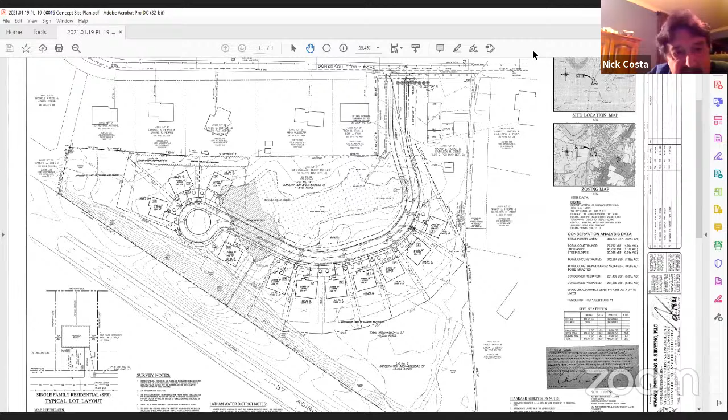Hey Nick, you talked about a vinyl fence along the backs of the houses on Dunsbach. Is that a proposed fence? No, it's existing. That's existing, if you go out there. Yeah, I've been out there. I didn't know whether you planned on keeping that in place. Oh yeah, we have to - I think it's actually pretty much on the property line. Some of it is on our side of the property, and some of it meanders, obviously. You can see it on the plans that it goes on both sides of the property line. So I don't know who owns the fence, but we're certainly not going to be taking down the fence. There's no reason for us to take it down, so it's going to remain there. Okay, thank you. You're welcome.